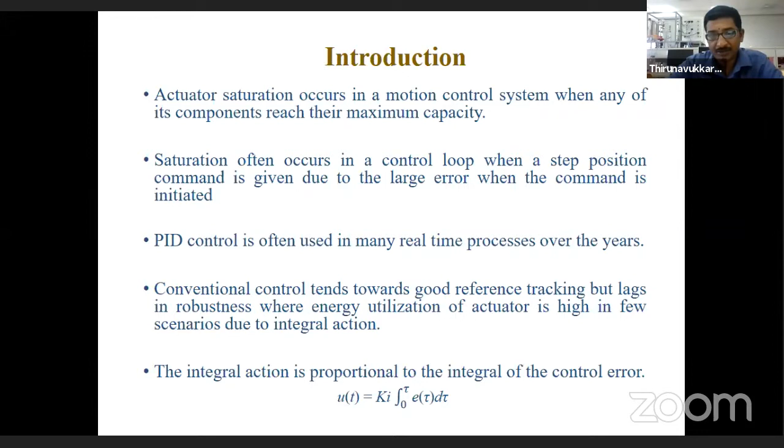I can recalibrate the maximum and the minimum speed of the pump, so based on the requirement it's like adjustable speed. I can fix the minimum and maximum RPM of the pump for the given 4 to 20 milliamps. It's like a peristaltic kind; the peristaltic pump is also operated with the same kind of feature.

But peristaltic pumps are meant for minimum flow. When you're going for direct pumping, I can operate from a few liters to 10 to 15 liters per minute. So that means I can go for a huge quantity. That is a huge version of the peristaltic pump.

So now, actuator saturation. What is called actuator saturation? Normally, when you're going with the simulation, we'll get a nice response with respect to the transfer function, the state space, or the differential or partial equation which you are modeling, either the linear way or the non-linear way. We get a very satisfactory response in simulation.

But once you go for real time, the simulation and real-time results will vary widely. Not only because of the non-linearity; there are certain issues with actuator saturation. Whenever you are simulating any algorithm in Simulink or in an M-file, we have to put a limitation on the manipulated variable. The manipulated variable is the controller signal.

Whenever the control signal is coming out, we should not consider it as 0 to infinity or a negative value to a positive value, because in reality any physical actuator will work minimum 0, maximum 100%. It cannot work below 0 and it cannot work beyond 100. So there is a limitation. That means this is a constrained problem.

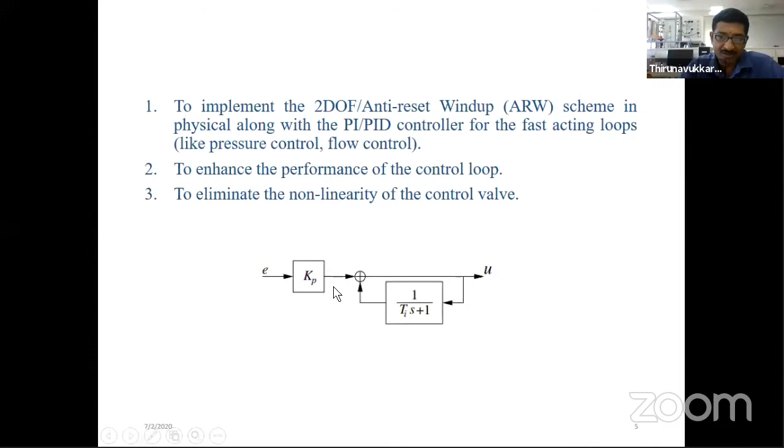Okay, one of the most commonly neglected undetected problem in the feedback control system. What wind up? That means I'm talking about the wind up issue now. Okay, so sorry. So wind up. One of the most commonly neglected undetected problem in the feedback control when you are going for the real-time implementation is, mostly we won't encounter it with the simulation.

Sometimes we design the controller, we accept the result as it comes, but we fail to analyze the system output is greater than 100, or sometimes the controller output will be beyond 100. Okay, it will be like 300, 350, even 700 it goes. You won't bother about that because in simulation, there is no wind up going to happen.

I won't bother about the actuating signal, but when you're going for the real time, none of the actuators will work beyond 100 and below 0. You have to put a saturation limit, else your results are going to be heterogeneous. Okay, that's what I said. The most commonly neglected and undetected problem in feedback control. The controller's command exceeds the physical saturation, non-linearity.

So in MCT, modern control theory, we study about the non-linearity. What we study, relay, saturation block. We go with the different non-linearities. Okay, so friction, viscosity, saturation, relay, hysteresis. So the different non-linearities are available, and using the describing function we can solve. The same way the control valve saturation is also one kind of non-linearity.

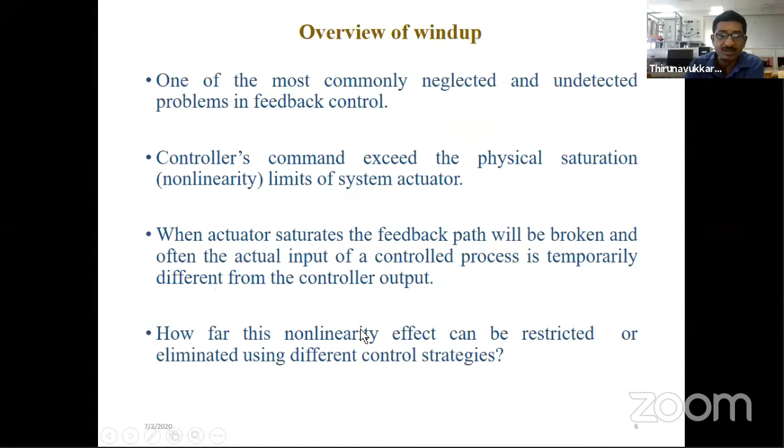So wherever you are using the control valve, do not use it without the valve positioner. If you use the valve positioner, yes, the last point in the last slide can be addressed. So how far can this nonlinearity effect be restricted or eliminated using different control strategies? The control strategy is going to be different. That means it is going to give the signal to the I to P converter. This is the I to P converter.

Because mostly we are going to use the electronic controller, it gives 4 to 20 milliamps. I cannot connect it directly to the valve. So give it to the I/P converter, which converts the current into pressure. The pressure is given as the actuating signal through the blue line, and this is the air regulator, which is used to restrict the amount of pressure coming from the compressor.

Almost 30 psi we will be giving, but maximum I'm going to use 3 to 15 psi here. The supply pressure to the control valve should always be double of its actuation. 3 to 15 is the actuating signal. My air regulator should be capable of providing at least 30 psi, double the 3 to 15. We keep it a little bit more because there will always be some pressure leakage.

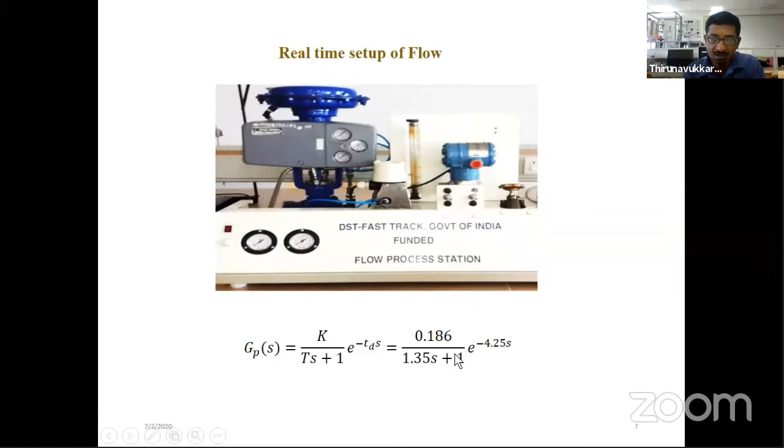The work was supported by the Government of India Fast Track grant. We have modeled the process, and we have got it as a locally linearized model. We got the model as a first order process with dead time.

I cannot explore all the control algorithms. I'll quickly tell about the problem which we stated. I think all are clear with the problems now. What are the problems? The actuator will go into saturation. So we should not go for the simple PID controller. We are going for the IMC based 2 degree of freedom PID. I'll explain what is 2 degree of freedom PID.

Normally, the PID controller will encounter overshoot. Always when we use a PID controller, I can go for proper tracking, but there will always be an overshoot. That is called the derivative kick. When you want to make the PID controller work like a first order system response, the response will start and directly go and settle. There will not be any overshoot or undershoot. It comes like an overdamped system and settles. It won't act like an underdamped system.

So the derivative kick problem can be addressed by using a 2 degree of freedom structure, which is an advanced control structure. People should know when we call it a simple control system and when we call it an advanced control system. Whenever you are breaking the concept of the single feedback loop and making some modification in it, it is called an advanced control algorithm.

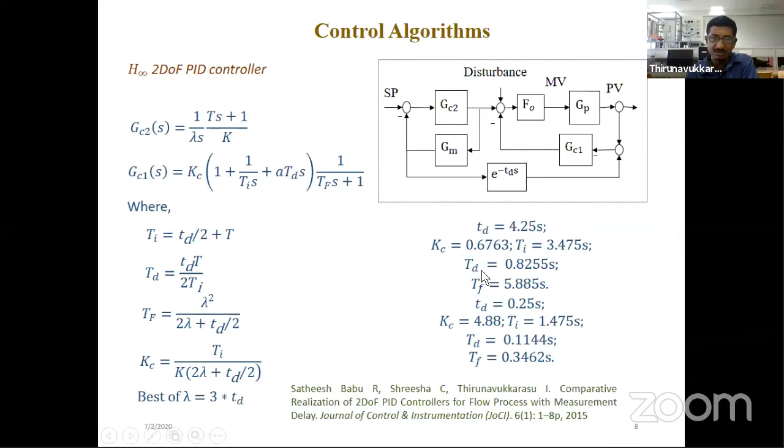The DAQ we used was the constraint, but presently we have a DAQ card where I can define my own sampling time, like a DAQ card or dSPACE. Yokogawa has released one DAQ card. There are many DAQs available, advanced control equipment.

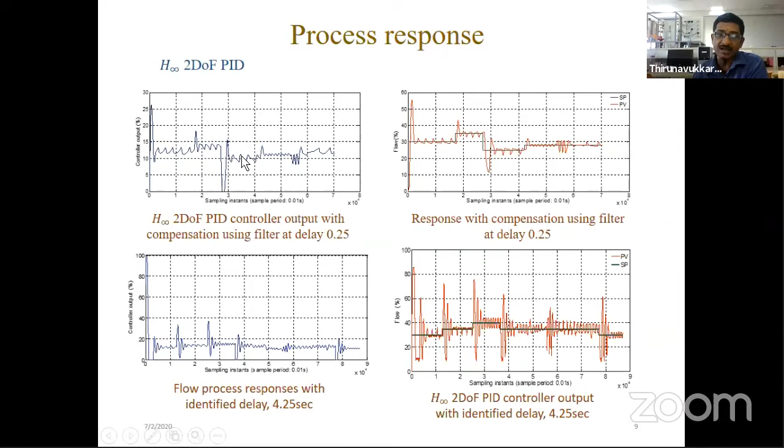Even if it is a pneumatic actuator, the rough movement of the valve will lead to wear and tear, cavitation, flashing, etc. Many things will happen because of the flow process. Cavitation and flashing are other problems. Once the actuator keeps on oscillating, it leads to several other problems. So here we are getting a smooth controller action compared to this. And once I make the MV constant, I can get a better PV also.

This is the 2 degree of freedom PID. This is what he has done here: one is 2 degree of freedom PID, one is H-infinity based 2 degree of freedom PID. When you come to the 2 degree of freedom PID, concentrate here. I mentioned EI, the integral error. I'm not talking about the overall error, I'm talking about the integral error. Integral error is KC by TI times E. This is the integration plus this is the saturation limit.

If I give a control signal U which is higher than 100, U saturation is always 100. I don't have the diagram. If you have a control signal followed by a saturation block, and the input to the saturation is 120, the output of the saturation block is 100. The input to the saturation block is U, the output is US. So 100 minus 120 gives a negative value.

TT is the tracking time constant. TT is equal to TI by 2 is considered here. There are several formulas for the tracking time constant. TT equal to TI I can use when I'm using a PI controller. TT equal to square root of TI TD when I'm using a PID controller. You can refer to the book of Antonio Visioli, Practical PID Control, to understand that. I've told it orally in brief. These are the structures of TT we considered.

So what happens if I consider this? I can go and reset the value. Whenever you are using a PID controller, remember your KI or integral action should not always be present, which creates the problem of saturation. So what should I do? We should limit the integral action. Once the controller goes to saturation, my integral action should be cut temporarily.

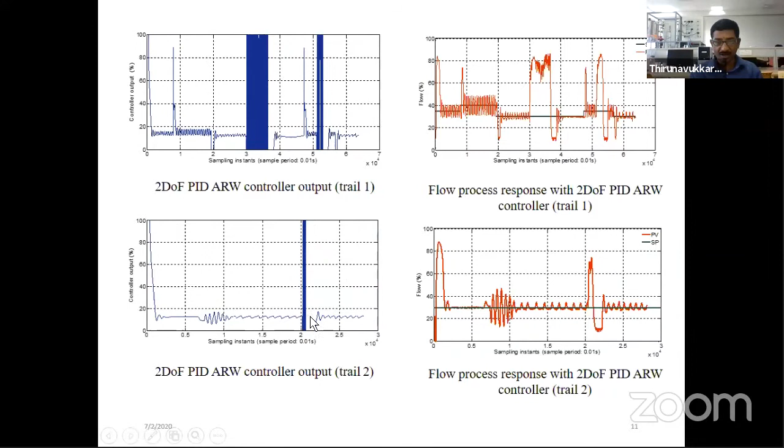You can see exactly between 2.1 and 2.3 the system output went out of control. That means the actuator signal goes below 0 and beyond 100. This is the problem. This should not happen in the process industries. And we have proposed some solutions with the PID controller. See here, the wind-up is happening, but still my process variable can track the set point irrespective of the wind-up issues. So the process response is tracking the given set point change.

See here, why this happened: at 2.8 something, I gave a set point change. This is what I said. Once a large error happens, the wind-up issue will happen. I think I addressed it in the first slide, third point. So you can see here I gave a set point change. Can you see the time? Almost 2.8. You can see the wind-up happen. That means once the system error changes drastically in a real-time application, the wind-up happens.

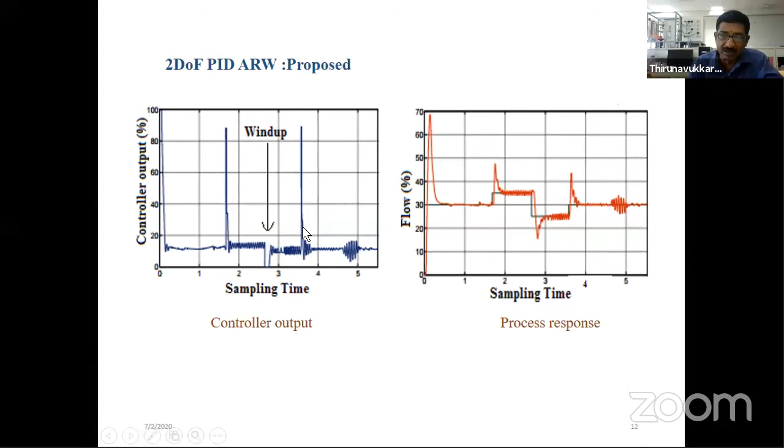But here we made the solution for the 2 degree of freedom anti-reset wind-up. Hence, the system output is not going out of control. It can still track once the wind-up issue is happening. So here we made a different plot. Here we plotted the error as well as the controller output, because these are the concept of anti-reset wind-up. So we plotted error and the controller output together in a plot.

Blue is the controller output, the overall PID controller output, because the controller action is based on the error signal. So this is the error and this is the controller action. You can see here there is a change in the error. Obviously, my controller output goes to 0 to 100, and then it is tracking back here. This is the wind-up region.

It can be observed that the final control element was released from its saturation as quickly as possible to minimize the IAE for a large reference set point change. That means we have implemented the solution for the wind-up issue. So even though the blue line, which is the controller output, goes to saturation, immediately it will be kicked back from the saturation stage. That is with the help of the anti-reset algorithm which we selected.

So you can see immediately after reaching the minimum value, it goes to 0, and then it has been pushed back to the nominal above 0. Look at the y-axis scale, 60 to 0, and below 0 is where the controller action shows saturation happened, but it has been quickly sent back.

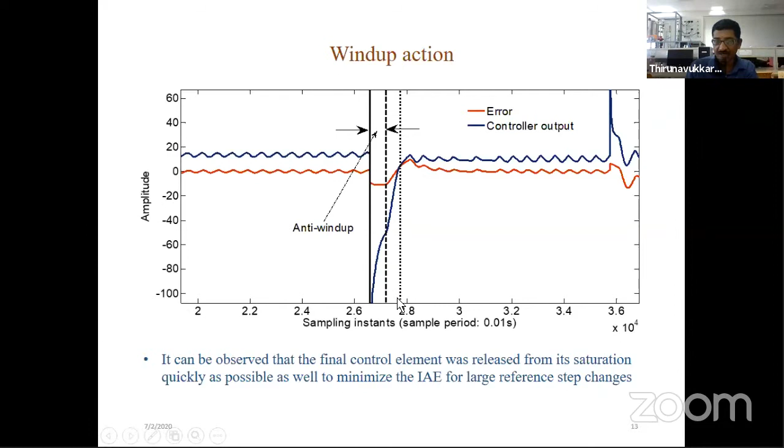Within 2.6 seconds is a real-time result, 2.67 within 2.78. Quick action has been taken by the proposed anti-reset windup, and these are the time domain as well as performance results.

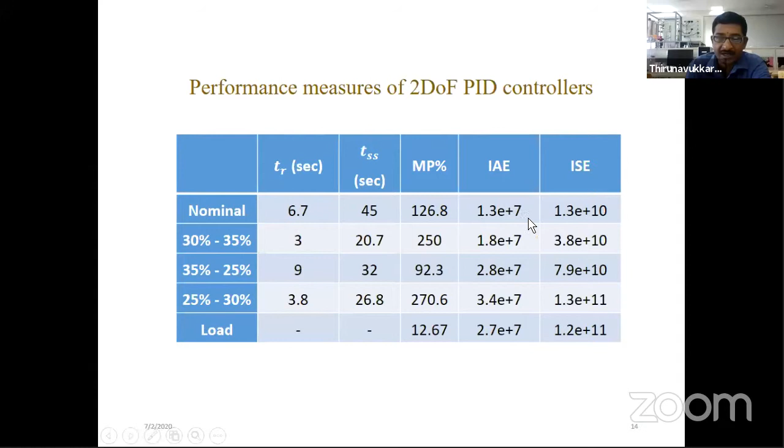It's a heat exchanger. So once the system model is locally linearized in terms of a first order system, once the hot water flow rate varies, the system will move from one operating point to the second operating region. You can see four rotameters, one is for the input cold water to the process tank, and this is the hot water inlet to the heat exchanger. So what is the heat exchanger?

It's majorly used in all process industries - dairy industries, chemical industries, all process industries have a heat exchanger. Even in simple dairy industry, there is a process called pasteurization. What they do is the dairy product will be boiled to a higher temperature, and suddenly the temperature needs to be lowered. So pasteurization happens in all dairy industries. They use the heat exchanger because the difference in temperature they bring is very high, almost 10 degrees and above.

So in a short span of time, because huge quantities of dairy products are involved, they cannot cool down that quickly, so they use the heat exchanger process. Or in distillation also heat exchanger needs to be used, to convert the vapor into the top product. Anyhow, this is the process description, so I'll skip it for the time being.

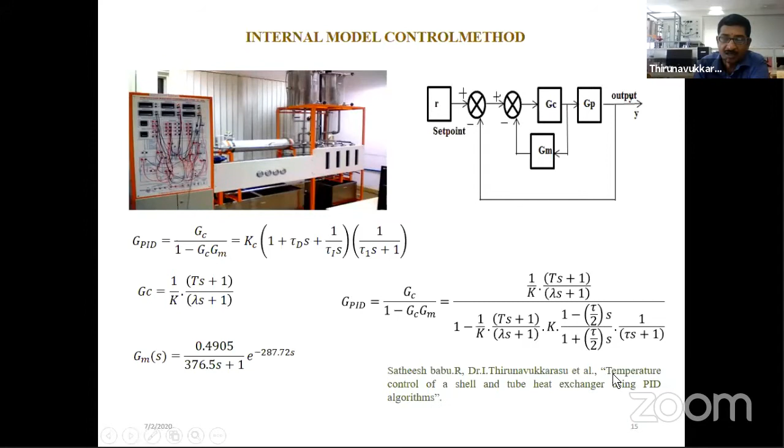This time the time scale is given in seconds, you can convert it into minutes or hours if you want. This is the PID control structure, simple IMC PID we have used. This paper is there with the title 'Temperature control of a shell and tube heat exchanger using PID algorithm.' I think in 2013 we presented this paper at a London conference.

Can you see, because in temperature process we cannot give set point changes like 10, 15, 20, etc. It will take time. Maximum if you're working with a real-time temperature process, maximum 3 to 5 degrees Celsius we can give, because it's a slow acting process, else your actuator will go to saturation. For 2 or 3 degrees only it is going.

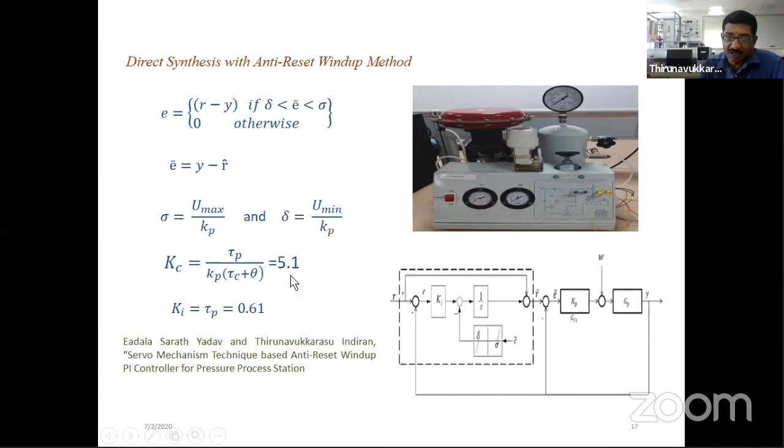So we implemented this KPKI structure, using a saturation block, etc. Here is the result of anti-reset windup with and without anti-reset windup for the process - a very fast acting process, which is a pressure process.

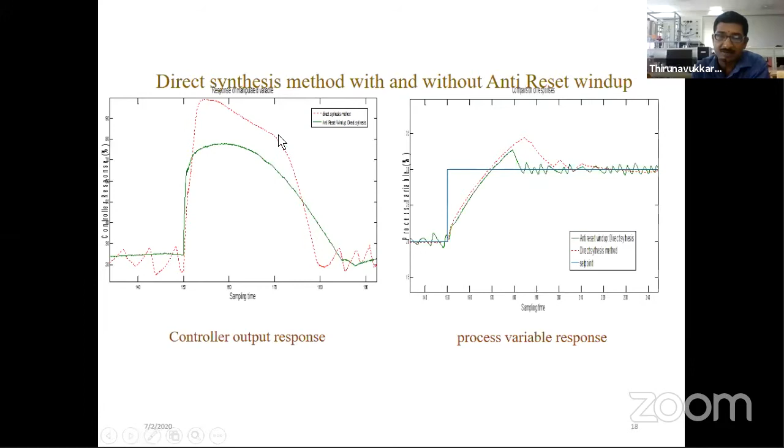You can see the anti-reset windup is giving a better response. Not only the process variable, but even the manipulated variable of the direct synthesis acts very violently compared to the manipulated variable with anti-reset windup. The PID controller is the same - we either added the anti-reset windup scheme to it, or we didn't add it to the other scheme. You can see these are all real-time responses, not simulation responses.

And then you can go for the modified Smith predictor. This is published in Springer proceedings, I think in 2016. It's available online, you can refer to it - the modified Smith predictor algorithm.

Whenever dead time is present in the system, we cannot go for normal controller design with PID. There is a technique called the Smith predictor, proposed in 1957, almost more than 60 years ago. Several research studies have been carried out on the proposed structure - this is not a 1957 structure. The first initial concept of the Smith predictor was proposed in 1957 by the scientist Smith, and henceforth it is called the Smith predictor.

There have been several modifications made to the Smith predictor structure by Normey-Rico, Watanabe, Ito. There is a certain group of people who worked intensively on the dead time saturation problem. Whenever dead time is present, they go for the modified Smith predictor concept, which we call a dead time compensator, DTC. Several modifications are still happening in that area, and we have used the back calculation method proposed by Antonio Visioli.

Okay, there are several structures given in this textbook, you can go through it. C1, C2, which is controller 1, controller 2. This is the diagram I'm talking about, this is the proper diagram of the anti-reset windup. Everyone can look, this is the controller. Whatever it may be, C1, C2, you block together as a single controller.

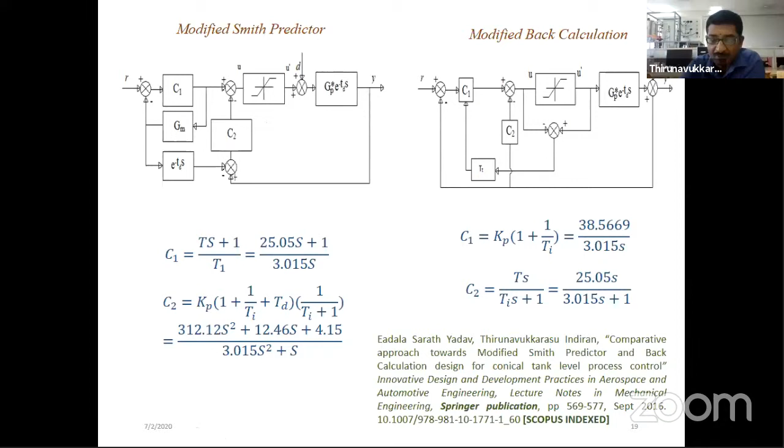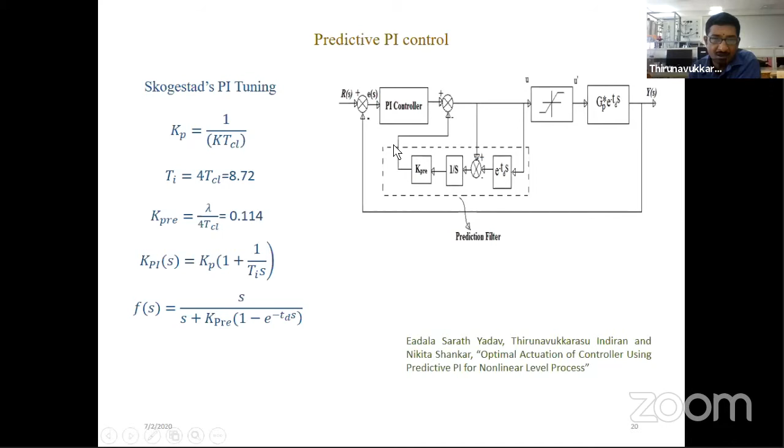And this is one predictive PI control structure, it was published under this title. So this is the control structure which we have made, and we can get a better response with this structure.

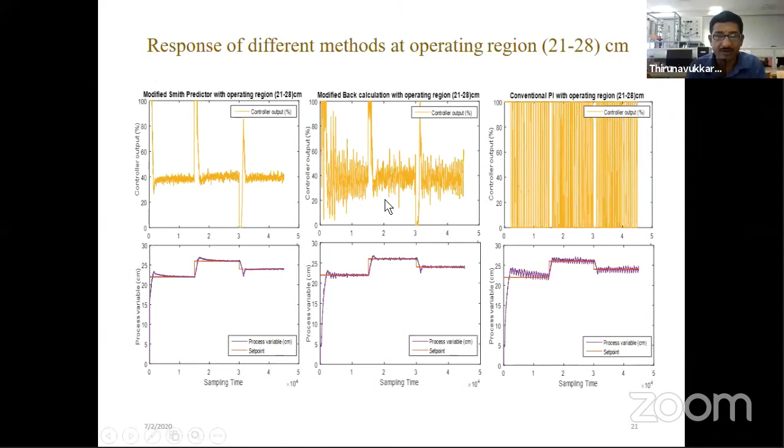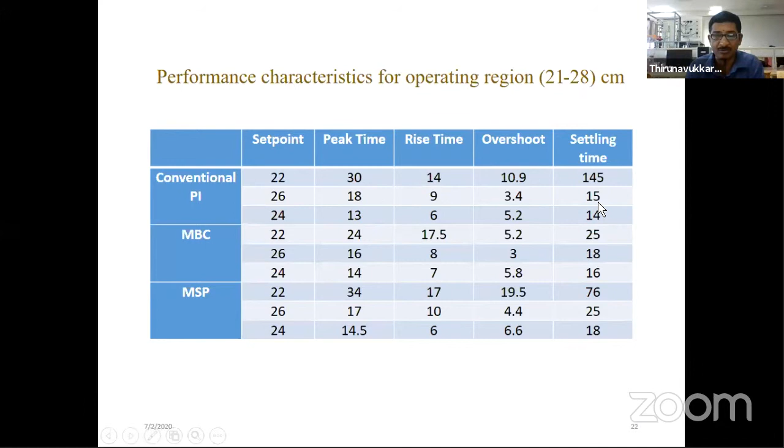Look at the controller action. There is no oscillation; the manipulated variable comes like a simulation. Look at the process variable. With damping, it follows the quarter decay ratio. When you're going for a PID controller, you should know what quarter decay ratio is. The first peak should be at one particular value, the second peak should be 1/4 of the first peak, and it should decay in that way. It's a well-established tuning rule. Your controller is good means it should follow the quarter decay ratio.

We operated it for different operating regions, and everywhere we are getting a very smooth operation. This is the physical setup which I have in the laboratory, which I showed initially.

Can anyone put a message? Are you able to track properly, listen properly? Organizer, moderator, any update? How is it going? Sir, it is fine, sir.

Okay, good. You can see here this is the control valve actuation, and this is the conical tank. What we did initially, why we made this setup cascaded: initially we had the pump here; this conical tank was given with the pump. Now I'm going into the nonlinear. First I showed the single flow process station result.

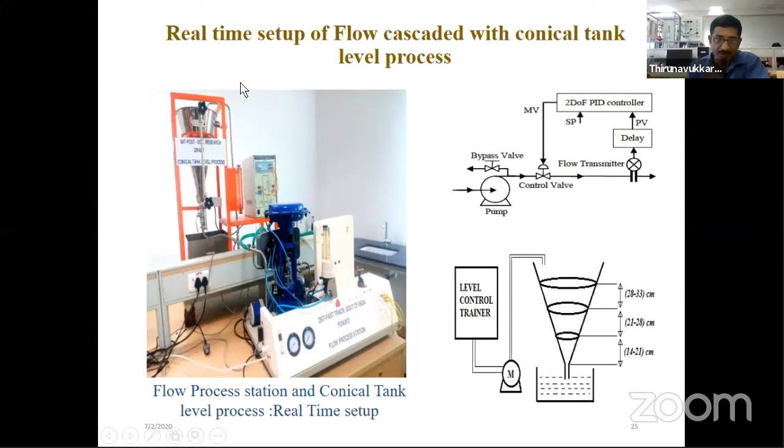So we cascaded the flow process station output with the conical tank input signal. We cascaded these two processes. And see here, this is the conical tank. You can see the non-linearity. I will explain how the non-linearity comes here. There are different regions: second region, third region, fourth region. We identified different models. In the second or third region, it works properly without much oscillation.

But once you come to the lower region, you can see the oscillation starts, because the model identified and controller designed is for the region 28 to 33. I think I showed it in the previous slide. In that region it works properly, but below that it is oscillating. You should understand this very clearly. We cannot model a system as a single transfer function or a single state space, because a nonlinear process has multiple operating points. It has multiple models, a multi-model.

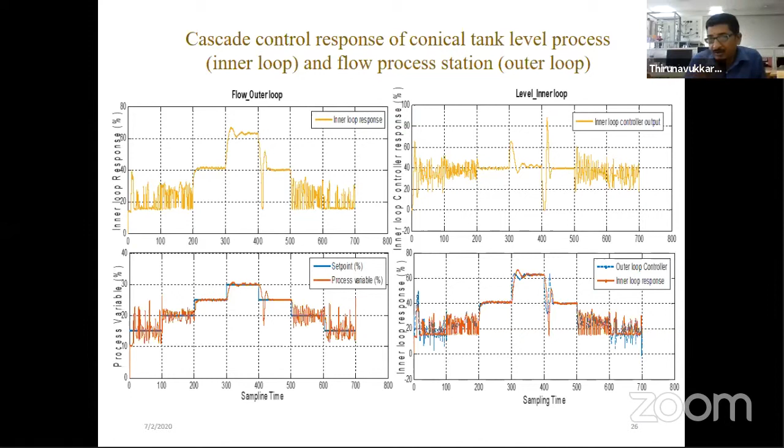That's the reason we should go for nonlinear controllers. We tried that too. For different operating regions or modes, you identify the model in a nonlinear way. This is the work done for the conical tank system with relay-based model identification. Relay is a non-linear term: relay, saturation, hysteresis, viscosity, friction, a class of nonlinearities. So here we modeled the system using a relay-based operation and identified this model. You can see here we got a perfect result.

We should not compromise once we get a good result with one particular method. We should try to get a better response with the simple PID. There is a group of professors working on the PI controller in India, like Professor Dr. M. Chidambaram from IIT Madras. If one group gets a result with an advanced control algorithm, he will try with a simple PI to get a similar response. There are certain PID groups all around the world who work only with the PI control structure and get results equivalent to advanced control algorithms with simple PID.

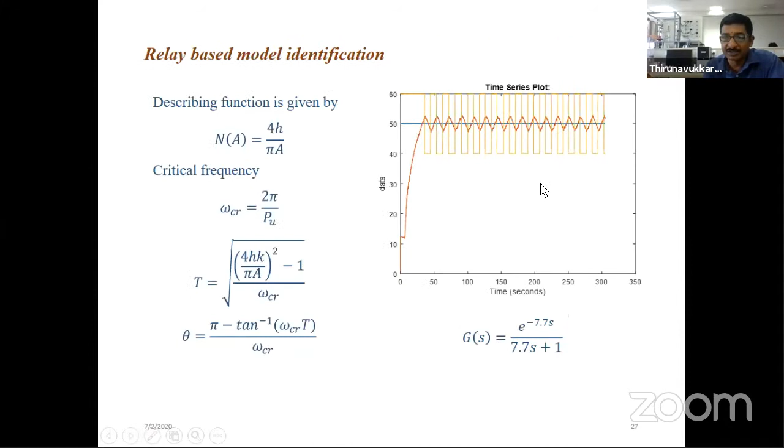Means we have identified the exact model using different techniques. Okay, do not go for a two-point method, that is the process reaction curve. Maybe for initial understanding, okay, but when you're coming for real-time process model identification and implementation of a control algorithm, go for a standard identification method. There are several in literature.

We got a better response. See here, we gave a set point change and there is no overshoot or undershoot. There is one overshoot, it got settled. I applied a load again, one overshoot, got settled. Look at the manipulated variable, it reaches steady state. That is very, very important.

What is the title I gave? Actuator energy minimization and optimal use of actuator. See, I'm using my actuator optimally. It oscillates and the actuator output comes around 45 or 46 and settles. When I give a set point change, it rises again to bring the level. Once the level is brought here, again it becomes constant.

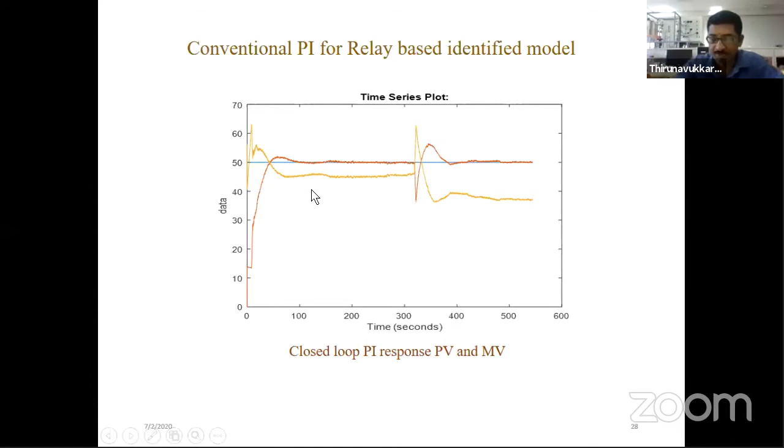Temperature, pressure, flow, level, anything you work on, our actuating signal should be at steady state. Until then, you have to rework. There is no other option. Or tune it. Identify where you made a mistake, and minimize it. A good control engineer will not leave the manipulated variable oscillating for long. Okay, fine. So end of first presentation, I'll go to the second presentation.

We deeply acknowledge the financial support which we received from the DST, Government of India. We completed this project in 2017. This is the book which I said. Antonio Visioli, Modified anti-windup scheme, sorry, it's a paper. He has written a textbook also. These are the major papers of Antonio Visioli which we followed for the anti-reset windup. As I said, Weidong Zhang from China worked on this paper.

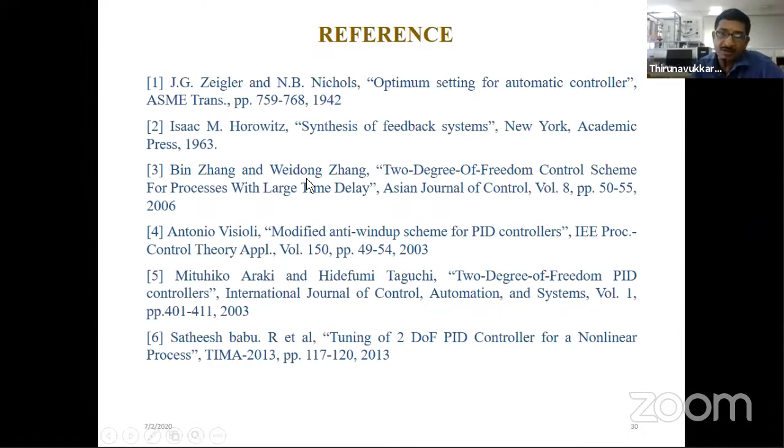I think this group is from Italy. Matausek, this is also very good. M. R. Matausek's group worked extensively on the modified Smith predictor. Watanabe and Ito, long back in '81, and still people are working on that. The same group is also working; the last Watanabe Ito paper I have seen is from 2007 or so. O. J. M. Smith.

The predictive PI is the Pasi Airikka paper. That group worked with predictive-based PID, not the MPC-based control structure. It's a different concept of predictive. As I said, Professor M. Chidambaram's paper, you can see here: relay auto-tuning identification. His latest work is also on relay auto-tuning identification, and he has recently written a textbook on relay-based identification with Cambridge University Press.

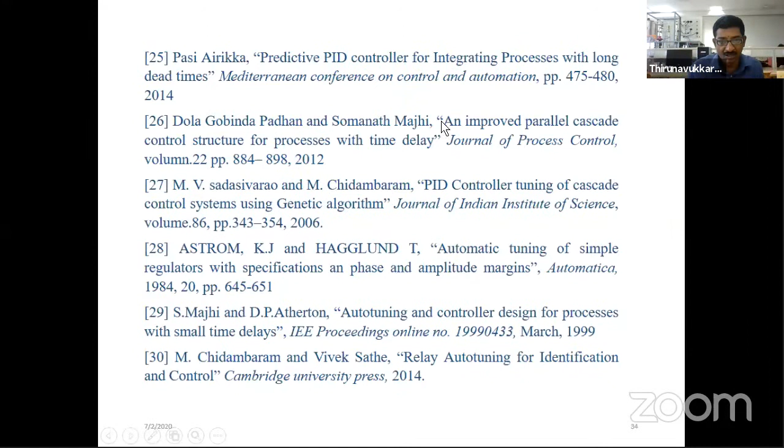PID control for cascade. Whatever result people get with advanced control algorithms, the professor will get the same result with a simple PID controller. And Somanath Majhi is with IIT Guwahati, EC department. He extensively worked with dead-time processes and integrating processes.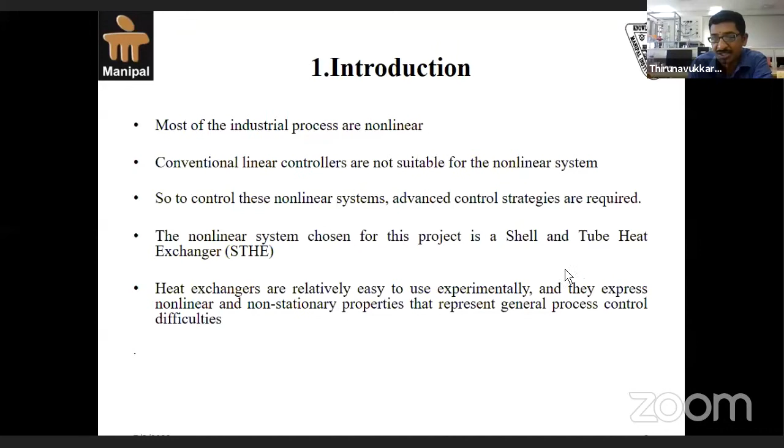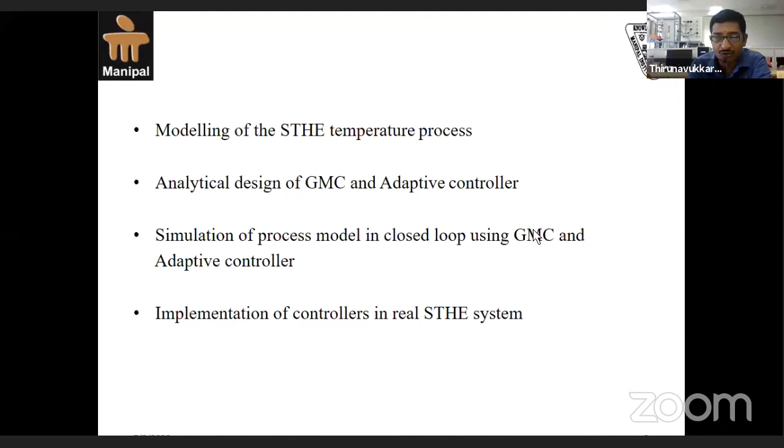The modeling of the shell and tube heat exchanger can be done in a linear or non-linear way. Analysis of the GMC and adaptive controller, simulation of the process model in closed loop with the GMC and adaptive controller, and then we implemented it on the physical system. This is the kind of work we started in 2013 for the shell and tube heat exchanger.

See the paper comparing model-based and conventional controllers on a pilot plant heat exchanger by Russell Rhinehart, Oklahoma State University, US. PMBC, process model-based controller; they started with that, then we started communicating with them. And you can see self-tuning controllers by Bobal, and Dostal and Bobal. These two authors worked extensively on self-tuning controllers for non-linear processes from about a decade back.

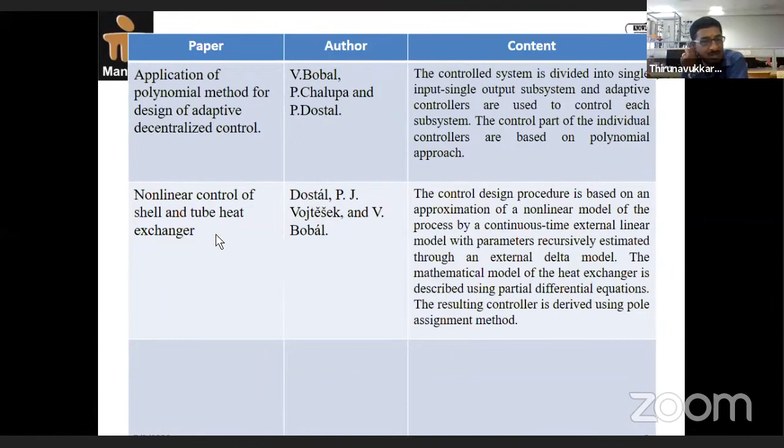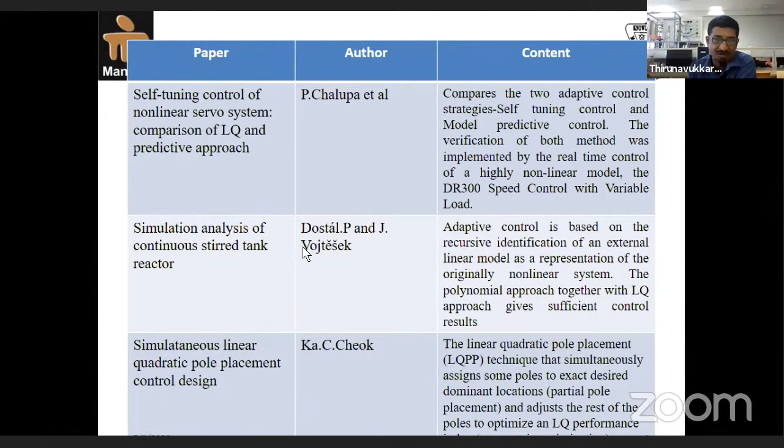There are some contents we have noticed. Just start counting: Bobal, and Dostal and Bobal, are almost the same group. One paper of Bobal, a second paper of Dostal and Bobal, a third paper, fourth, fifth. You can go through the titles also. They applied polynomial adaptive control for the shell and tube heat exchanger. You can see some comments given by Bobal and Dostal for the respective papers. Again Dostal, Bobal, simulation, and they worked on a CSTR process. Again Vladimir Bobal.

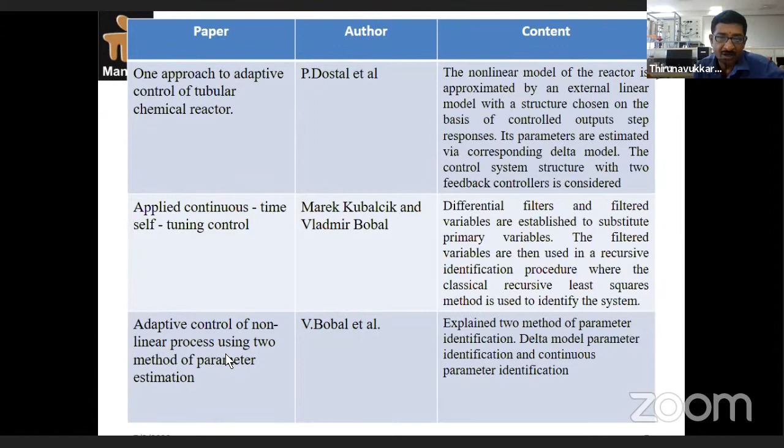Continuous-time self-tuning controller, again Bobal et al., for a non-linear process using two methods of parameter estimation. Again Dostal, again Bobal. What I want to convey is not the author names, just that one particular group has worked extensively on self-tuning controllers.

Okay, and the inference is what they said from all the literature survey, whatever I showed. When you are going for the industrial grade shell and tube heat exchanger control problem, you should not work with a static controller. Remember, when the process is dynamic, your controller should be dynamic. I should not put a static controller for a dynamic process. That is the case with the conical tank also. Area of the tank varies continuously. System is dynamic. I cannot put a static controller and blame the controller for not working. That's what I said, the problem selection, model identification selection is very, very important. We cannot simply put the blame on the controller, which is wrong from the author side or the people who are working on it.

So remember here the process is going to be dynamic, hence I need the dynamic controller. You can see here I'll explain the process. First understand the process, then we go for the control of it.

So heat exchanger, I'm giving the hot water inlet and it passes through the copper tubes and it is coming out. Remember, in the heat exchanger, there will be separate copper tubes and separate flow for the hot water and separate flow for the cold water. Both will not get mixed, but one goes surrounding the copper tubes.

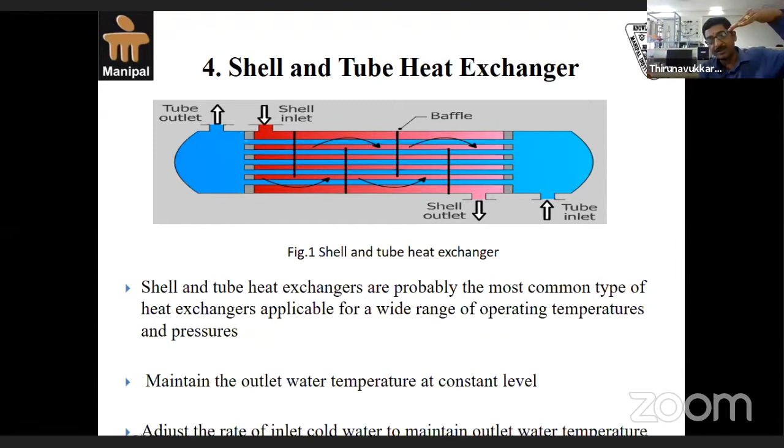Okay, my set point is 45 degrees Celsius. My process variable is at 40. Whether I should permit the cold water or not - set point is 45, process variable is at 40 - obviously no water should flow, because if the water goes, it carries away the heat further. Stop the cold water, then the temperature will slowly rise. Once it crosses 45 and keeps going above - 46, 47, 48 - then the valve should open and permit the cold water slowly. The heat transfer will happen. Once the heat transfer happens and it comes back down, goes below 45, then the valve should get closed. Got the point? This is the concept.

See here, for the generic model controller we have not identified the mathematical model using a transfer function approach or a state space approach. We build a first principle based model. First principle based model means using laws like the second law of thermodynamics, third law of Newton.

So M rho Cp is equal to UA delta T. If it is a constant mass, they call it a CSTR, meaning M rho Cp is equal to UA delta T. Here F means the flow rate, because the cold water flow is flowing in, so I replace M with F. M rho Cp delta T is equal to UA delta T. U is the overall heat transfer rate, and capital A is the overall heat transfer area.

See here, there are 4 temperatures, no? Inlet hot water, outlet hot water, inlet cold water, outlet cold water - 4 temperatures, and I used all 4. H means hot water, C means cold water. Hot water outlet temperature plus hot water inlet temperature, divided by 2, minus outlet cold water plus inlet cold water divided by 2, multiplied by UA, is equal to F rho Cp times the cold water inlet and outlet temperature difference. Now all these 4 temperatures are readily available in my hand.

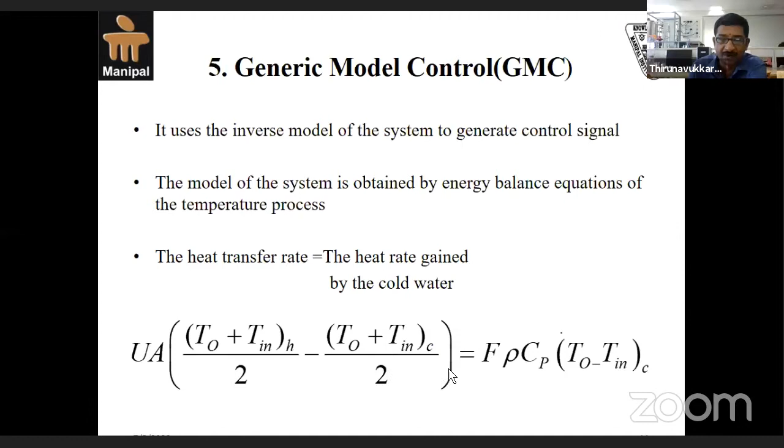I'm rewriting F is equal to UA... where is the F? Here. Okay, if I bring F out, UA divided by rho Cp will come. Correct? UA divided by rho Cp. The 2 in the denominator, both are common, so I take it as a common factor. So what happens here - I've rewritten F in terms of this. Then how to identify the F value?

How to identify the F value? Because I'm using a control valve. If the percentage of valve opening changes, the flow rate of the valve will vary. We have to relate that and use this formula.

See, the cold water valve inlet has equal percentage characteristics. The control valve I have in my laboratory is an equal percentage valve. Therefore the flow rate and control signal can be related, and the control valve can be identified. The relation is F equals M naught, e power mu into U. See what I'm going to do - we have experimentally identified this.

I'll take this value for now, you get this relation. Replace the F value, substitute it in this place. So what happens: M naught e power mu U is equal to UA divided by 2 rho delta Cp. This is the formula, and I want to get this U and the control signal U. This is the overall heat transfer rate, capital U; the control signal is small u.

Okay, I want to get this. What about the exponential term? Take ln, natural logarithmic. U is equal to - rewrite the equation. M naught also goes to this side, so ln of 1 by beta - this is the control signal. Using the first principle method, we got the control signal. How to identify the constraint? We should know this parameter and this thing. Now there is no transfer function shown.

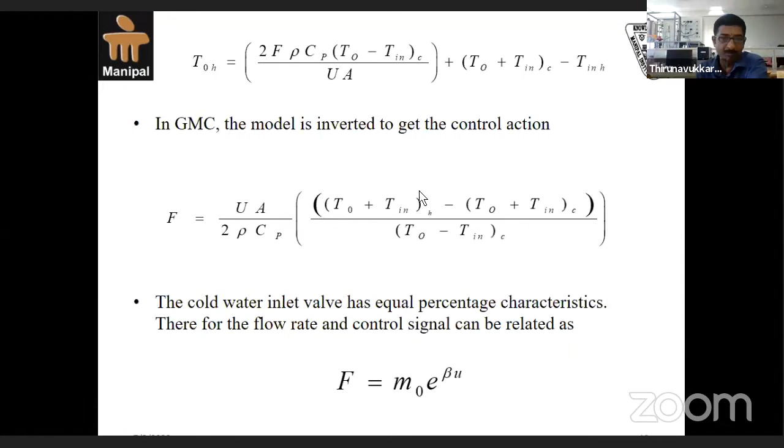The model is not exactly true to the process, which is the case in all real-time processes. All the pilot plants will have the same issue.

See here what we did. We used model identification of the actual control valve in the laboratory. I'm fitting it to the nonlinear function. These are the percentage of control valve opening, and these are the outputs, the liters of flow which you measured. The blue is the actual data obtained from the control valve, and the red line is the fitting which you have done.

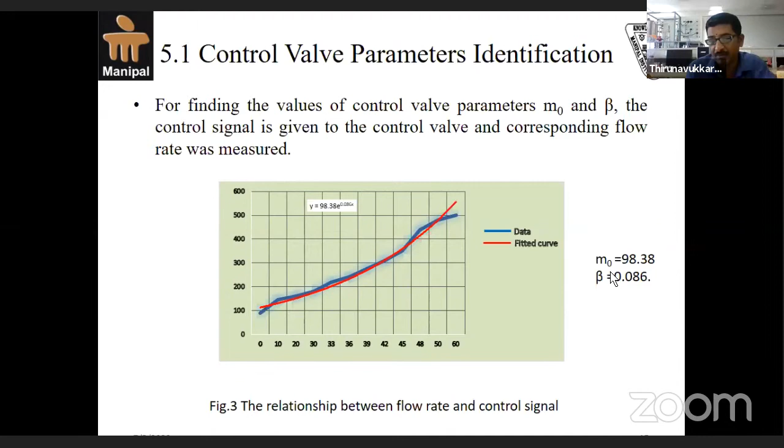So I got my m naught and beta value. Substitute here. Look at this, what I said, m naught and beta. Now I got this value: m naught is there, beta is here. I can substitute those two values.

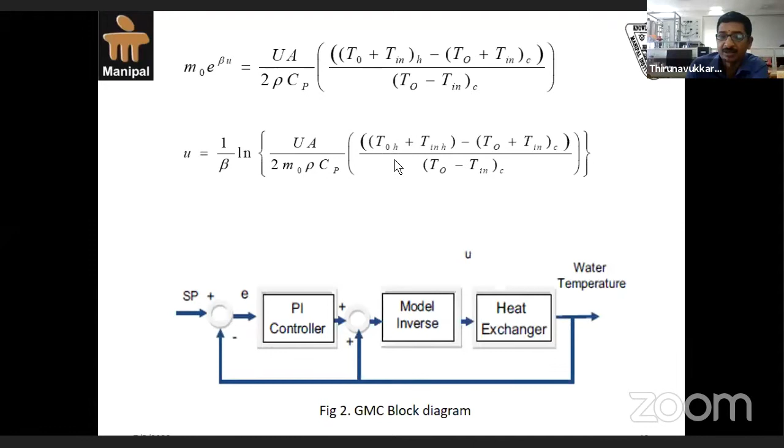If all other parameters are known, U is known, A is known, rho is known, Cp is known, and all four temperatures are measurable, then if you know m naught and beta, my control signal is ready. Then what's going to vary further? All these four temperatures are going to vary, so my control signal is going to keep getting updated. This is the control signal which we have generated.

All these values are substituted with respect to the physical system. See here, all we calculated: four unknowns are the temperatures. If the temperatures keep varying, I'll get my U. So I came to the multi-rate model, meaning whatever flow rate I give, wherever the temperature goes, I can get the control signal. The control signal is going to vary in line with the model changes.

These are the adaptive control concepts, and we use linear regression. We use linear least square regression, recursive least square algorithm, ARX model to obtain this. This is the project which we did in 2013.

We keep improving it. That is a different case: ARX, NARX, ARMAX, etc., we are doing. Nothing more to explain there.

Based on the past input output, I can get the phi, the coefficients which you get with respect to the past input and output data: A1, A2, B1, B2, etc. are the coefficients. The objective function is to minimize the error, the square error. That means I have to keep updating these values and substitute them, putting the Y value as minimum as possible with respect to the original system. Then only can I get my error equal to minimum.

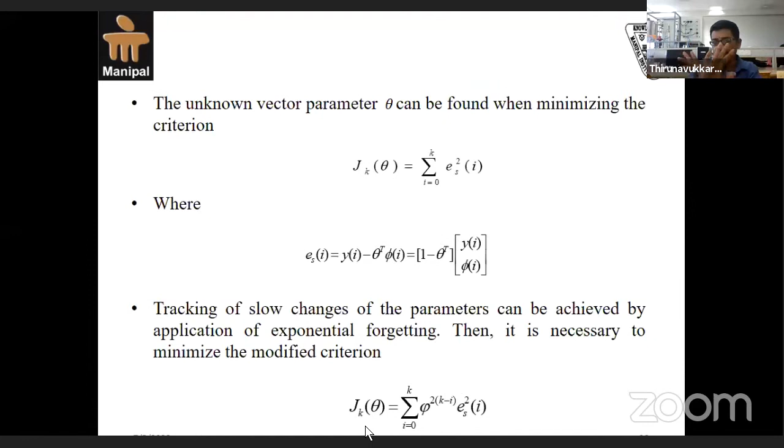Once your actual identified model of the process is equal to the true model, your error will be very less. Least square regression, then my model, meaning I'm not going for transfer function, I'm not going for state space. Online I'm calculating, minimizing the error as it is, then going for the controller action.

So this is the parameter estimation. What is parameter estimation? In the previous case, I said A0, A1, B0, or I fix the structure, the plant should be in this form. Then the plant, meaning I am assuming the plant is a second order process.

Then I should do parameter estimation. Because all the four temperatures are measurable, I don't want state estimation. I want only parameter estimation: A0, A1, B0. I should keep on measuring it. So these are the arithmetic calculations which you calculated. These are all standard methods for the least square estimation.

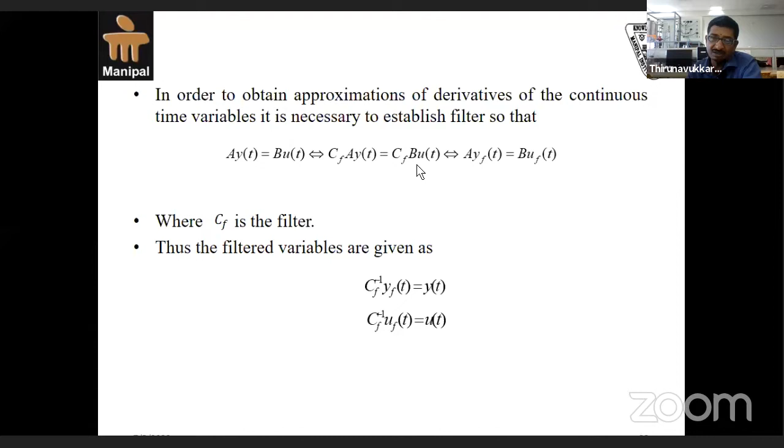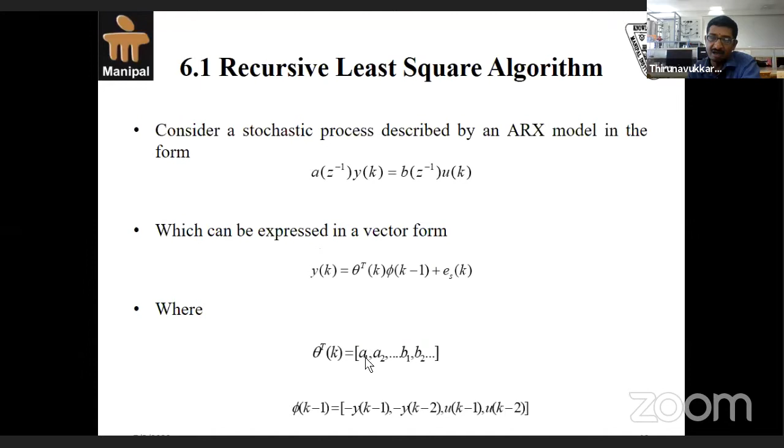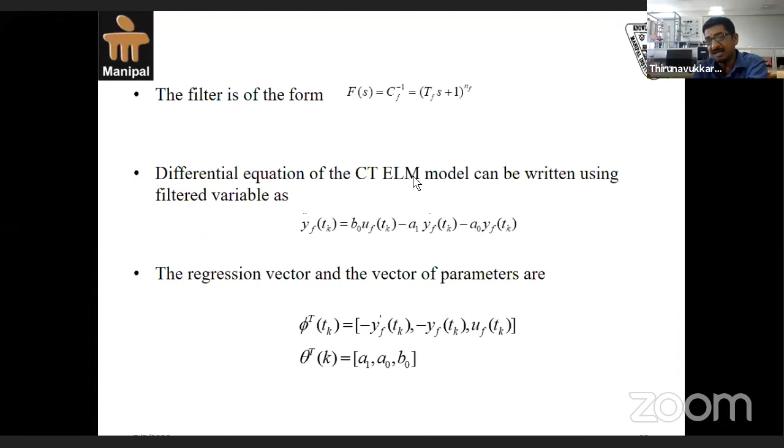So how to calculate the filter form? Initially, when I said it here, I represented it in a generic way: A1, A2, B1, B2. But I restricted it here. When I fix the structure, I have only three parameters. So I should do the ARX model only for the three parameters. Extended linear model. ELM means extended linear model.

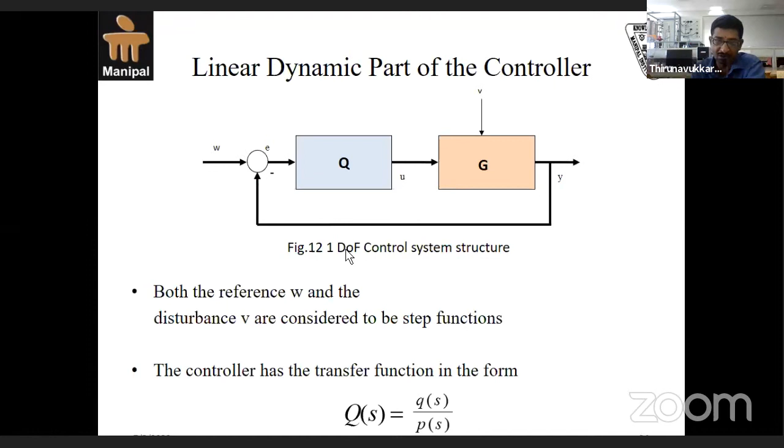So you see here, we operated it as a 1 degree of freedom. I'll show the 2 degree of freedom very soon. Q by P. Once you are calculating these ARX models, I assume you are aware of the ARX model. We cannot explain the ARX model here. It's a standard procedure; you can go through any reference material. Always the denominator should be higher order than the numerator, for realizing the system. That's what we are doing here.

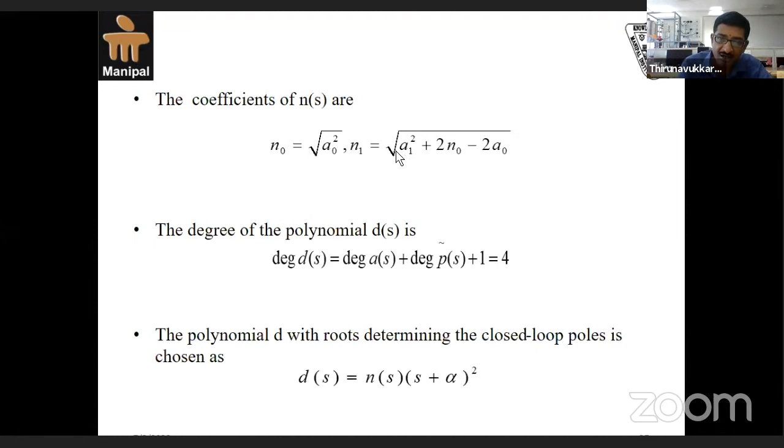Yes sir, because the numerator is second order and the denominator is coming as first order, we are approximating it with one more. Yes, the numerator and denominator become equal, and the polynomial has the form. Proceeding further, I can get my N of s, where N1 and N0 are the two unknown parameters. How to calculate N0? A0 is known from the previous parameter estimation. The square root of A0 squared is N0. What is N1? It involves A0, N0, and A1. Substitute here and I'll get N1.

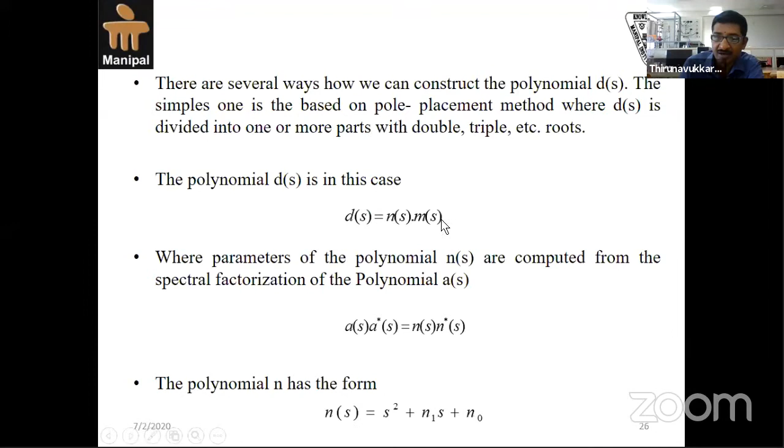We discussed P(s) on the previous slide. What is D(s)? N into M. Numerator is called N, denominator is called M. Complete this and get the S polynomial. Rewrite this in terms of parameters computed from the spectral polynomial A of s, in the form of A star, N star. Here I'm getting N of s, which involves N1 and N0. Substitute over here and get the form of D(s) finally.

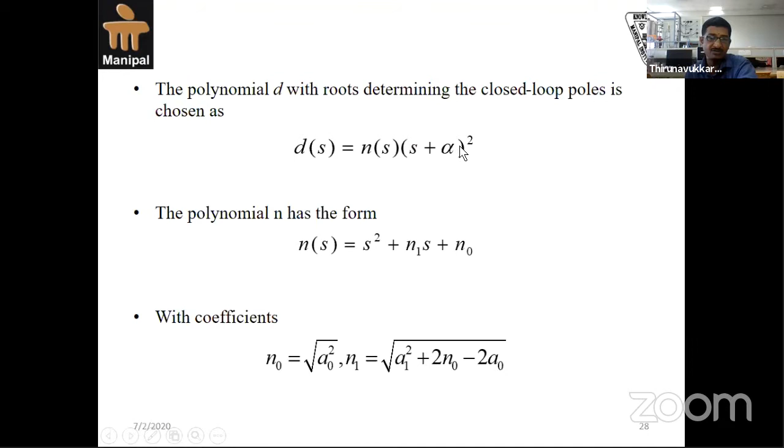Once you get D(s) and N(s), substitute over here and get the D(s) polynomial the similar way. Lambda, alpha, is going to be the tuning parameter, and then I'm going to put all the ARX model in matrix form. Look, these are all plant parameters, these are all control parameters. I'll show it in the next slide.

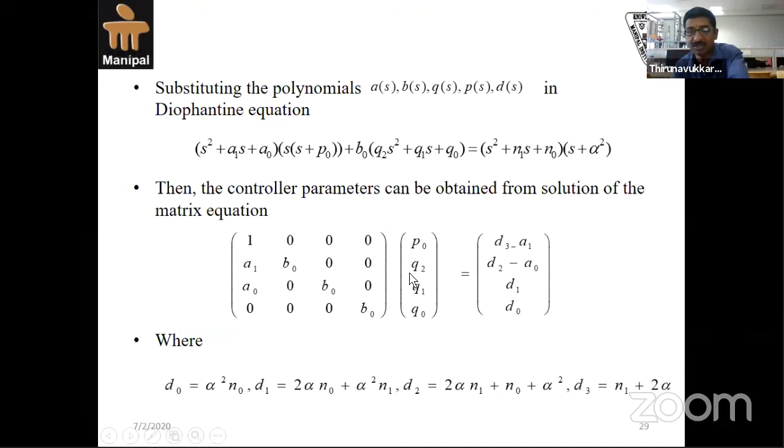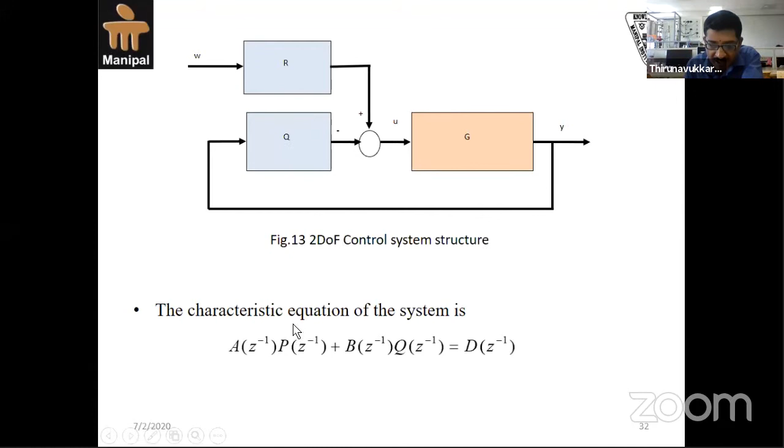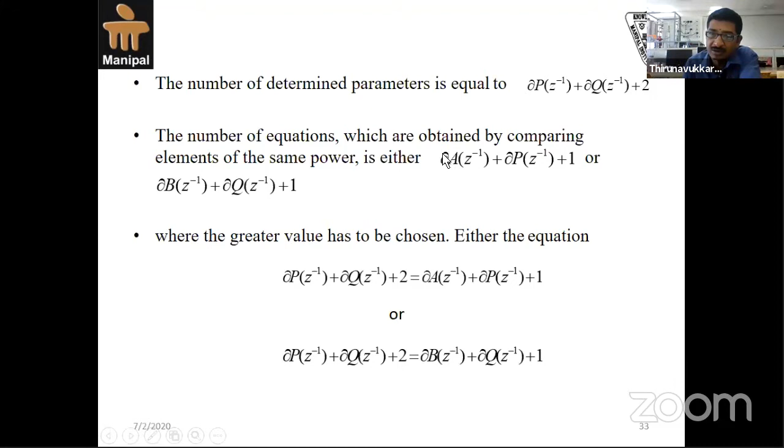So G is the system dynamics. Here we convert it into 2 degree of freedom, Q and R. We have to write the characteristic equation for the block diagram. Simplify it as the previous equation, and apply the partial fraction to linearize it around an operating point. You can refer to the paper we published or the standard procedure to get the linear form. What are Q and R? Q and R involve all the controller parameters. G is the plant, which involves A and B parameters, and Q and R are the 2 degree of freedom controller which forms your controller structure.

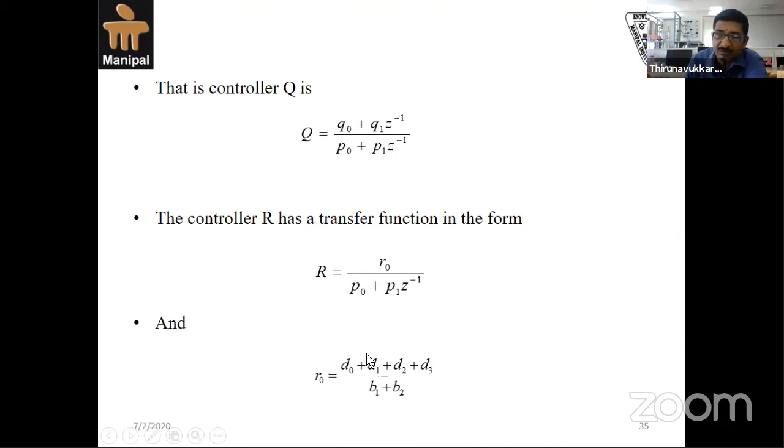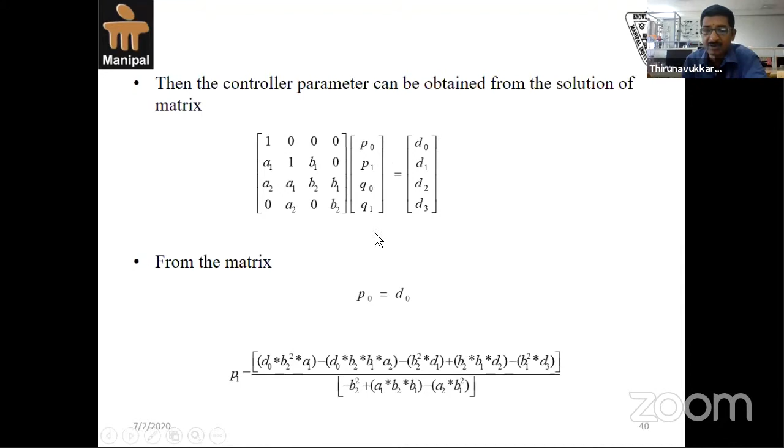These are highly mathematical, so I'll skip to the result. These are all plant dynamics, these are all controller dynamics. To get the controller parameters with respect to the right-hand side equation, d0, d1, d2, d3, which also involve the known plant parameters a1, a2. p0 is calculated from d0: if you multiply, all other elements become 0, so p0 equals d0. The same way, you can write the expressions for p0, p1, q0, q1.

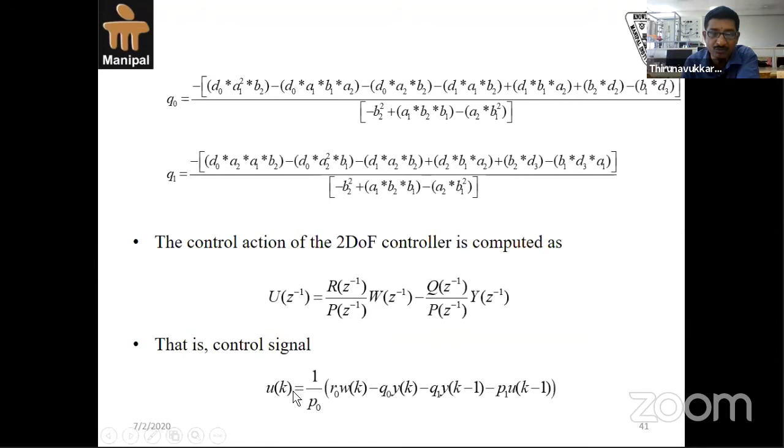That's what we did here. Simple arithmetic manipulation, substitute one over another, we are able to get it. And this is the controller action. As I said, P1, P, Q and R, we are going to use with the controller. This is what we have formed. The U is the control signal. Okay, so this is the simulation result.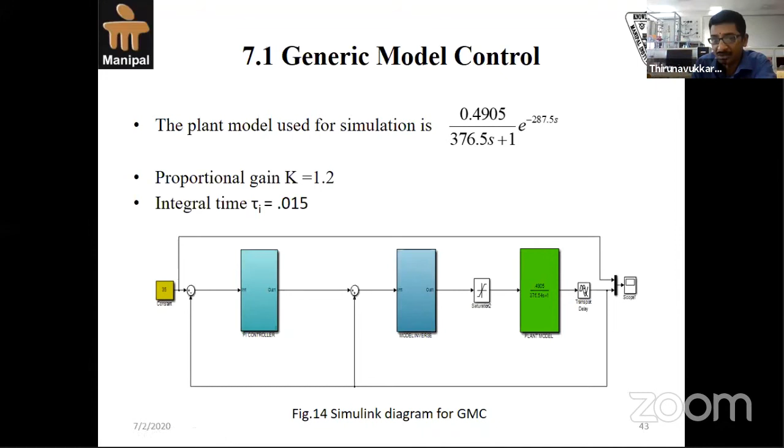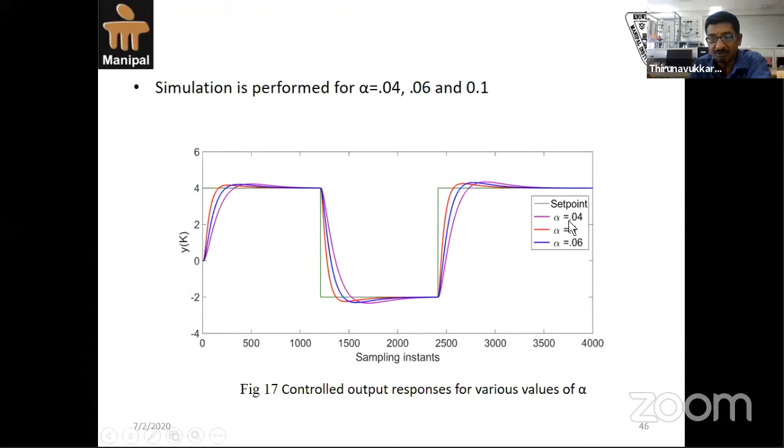Then we identified the transfer function. We simulated a proportional integral controller. It worked properly. Then we went for the adaptive control algorithm. These are all the step changes we gave with different alpha values. We're getting a better response. This is the manipulated variable. These are the real-time results, model parameter variation.

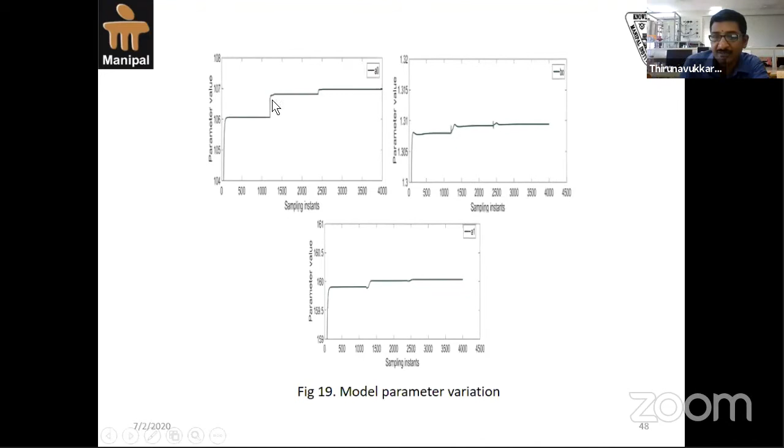Model parameter variation. So if the plant dynamics vary slowly, when I physically change the hot water flow rate, the plant parameters change, then the controller parameters change obviously. This is the control parameter variation online. There is no simulation. With the adaptive self-tuning controller, once the process dynamics vary, automatically my controller varies. But there are some limitations on this, which you will understand once you are working.

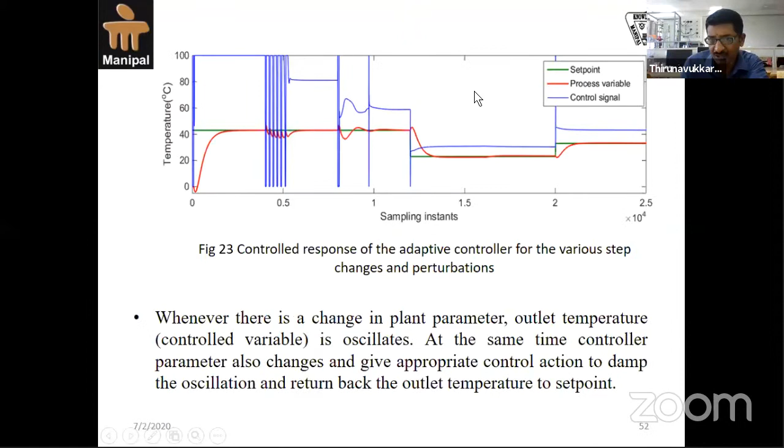So this is the simulation result. And this is the real-time result, and you can see the control parameters are varying. Even here we varied. This is the real-time response of the heat exchanger. The second nonlinear output I am showing. See here, this is the set point. Can you see the green line is settling?

A temperature process without oscillation, I'm making it settle, which once you work on it, you will know. Because if the manipulated variable is not constant, in a temperature process you can't make the process variable settle. But here you see, without oscillation, with the generic model control, it has reached steady state. Then I gave a step down, and it is acting on it. You can ask, once I give a set point change, how it is increasing and decreasing. Because a temperature process doesn't respond immediately.

It's like a tubelight and a fan. Once you switch off the light, immediately it gets switched off. If the fan is running and you switch it off, will it stop immediately? It has its own momentum. It will rotate for some time, then only it will stop. Same way, once you switch off the heater supply, the rise in temperature will not stop because it is already in the rising mode.

The temperature will increase. Then after some time it will detect that the supply to the heater has been stopped, and the energy from the heater will not be released. Then it was oscillating and then it settled. Can you see it properly settled?

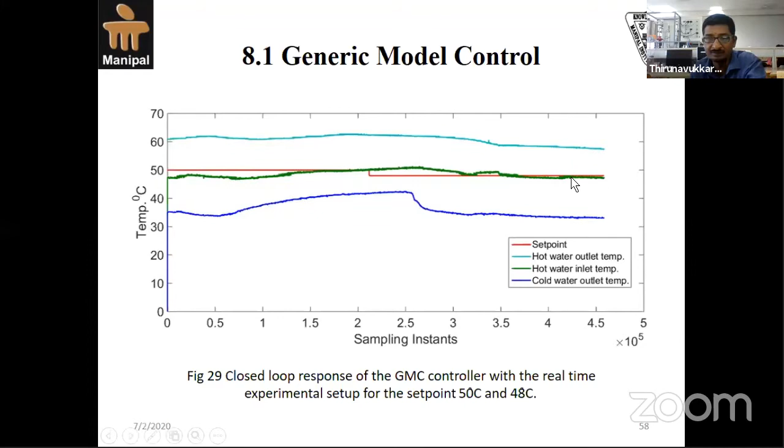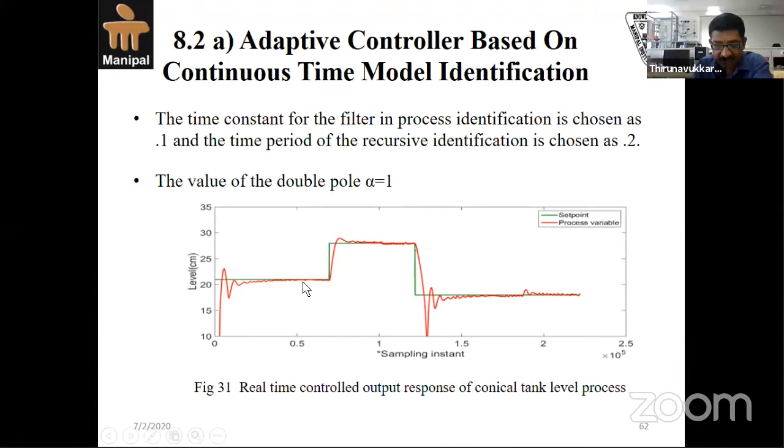So we applied the same GMC controller for the conical tank system, and we got a better response. See here, this is the controller action. Once we vary the set point, there is no second controller. Somebody asked about a multi-rate model. Only one controller I have. There is no transfer function of the model. There is no fixed controller. Once I give a set point change, directly my controller will vary.

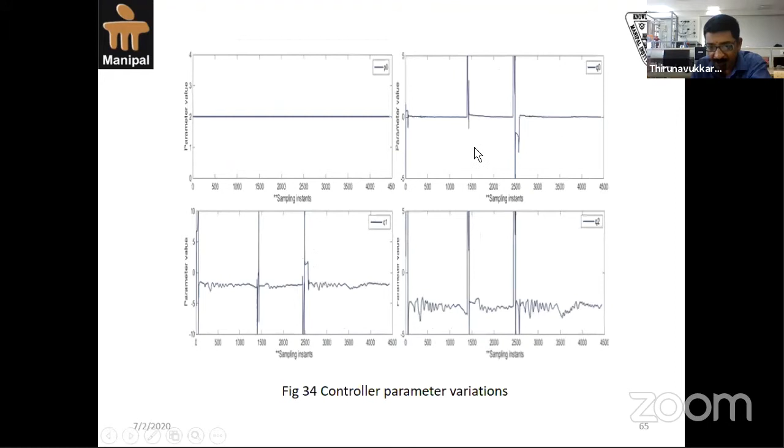So see, this is the plant parameter, model parameter variation. Once I vary the set point, suddenly my plant parameters will vary. Then my controller parameters will vary, and the output will go to steady state. This is based on continuous time model identification. You can see it properly settling, right?

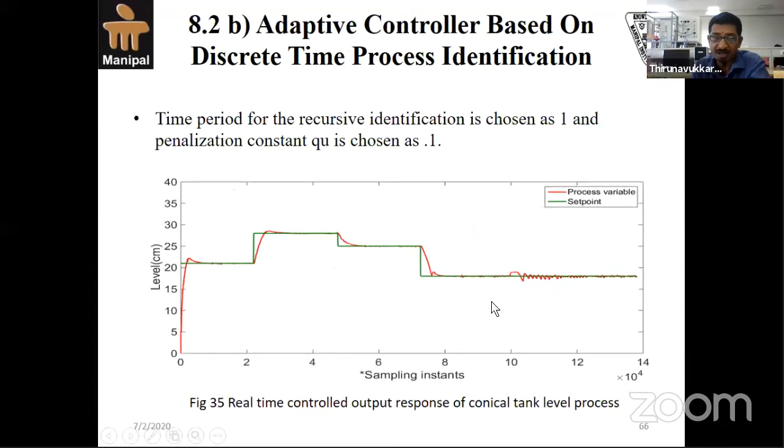See, discrete gives a better response than continuous. Remember. See, these are all continuous. You can see here it oscillates. But when we implemented the controller in discrete mode, you see the proper response we have obtained. This is the plant parameter, and this is the controller parameter variation online.

This is the pressure process. Whichever algorithm I make, I try to simulate it with a fast acting process, medium acting process, and slow acting process. Conical tank is medium acting, pressure is fast acting, temperature is slow. Now this is the second case, pressure.

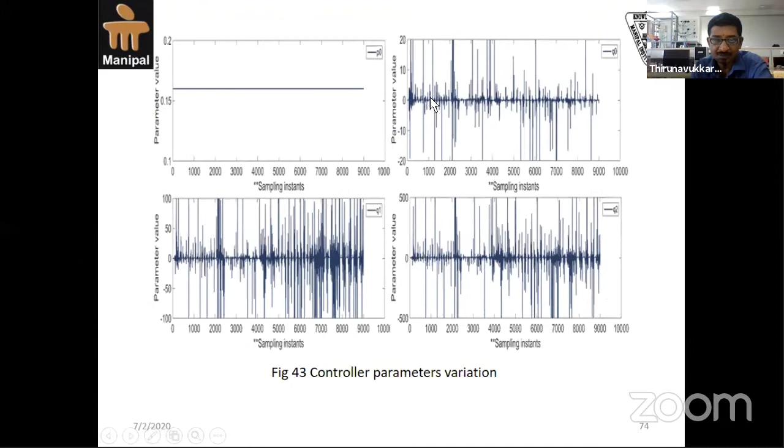See, it oscillates more. Okay, so the controller also oscillates. Model parameter varies, controller parameter varies. Okay, so here he made a mistake. I think he put wrong results here. It was 0 only. You see that wrong result, the parameters. Anyway, I have the PPT. It was varying, you can see here. See, here it varies, not at 0. It keeps on varying. Can you see? Keeps on varying.

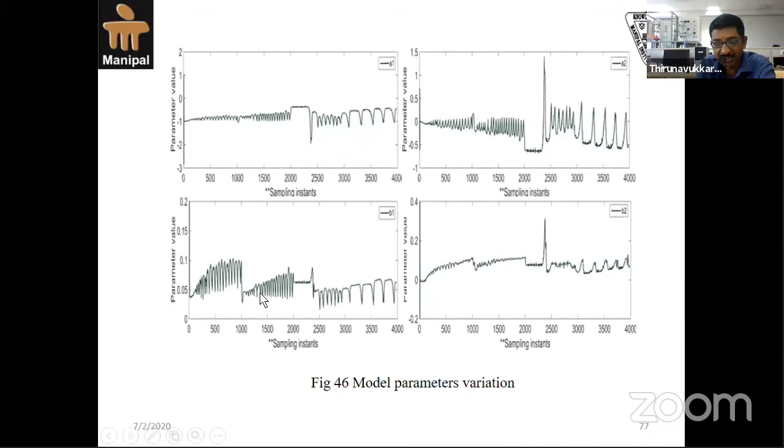Positive and negative controller parameter. The controller structure's various parameters keep on varying. Okay, you can see the variation. Once a set point change is given, suddenly it varies. See, at 1000 it varied, at 2000 it varied. It varied from 1000 to 2000 because I gave the step change. So it's varying. Conclusion, self-explanatory.

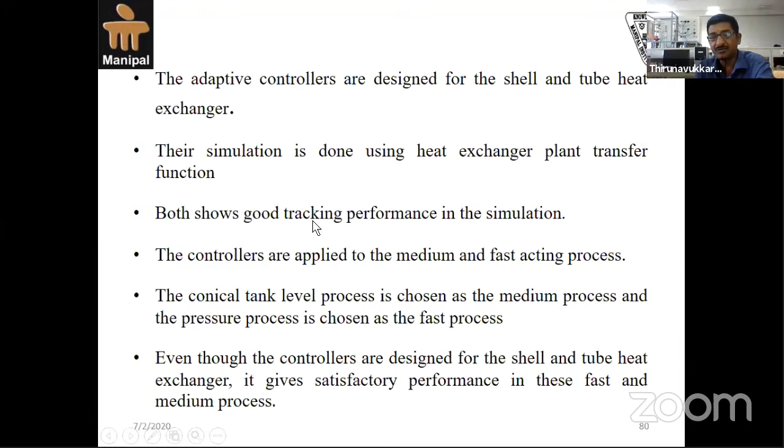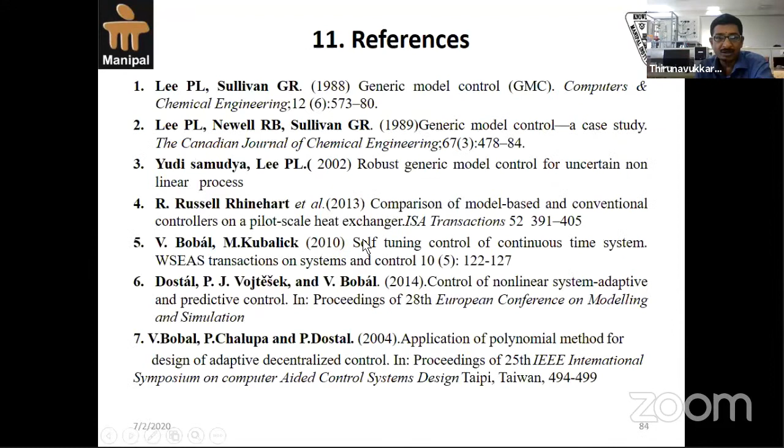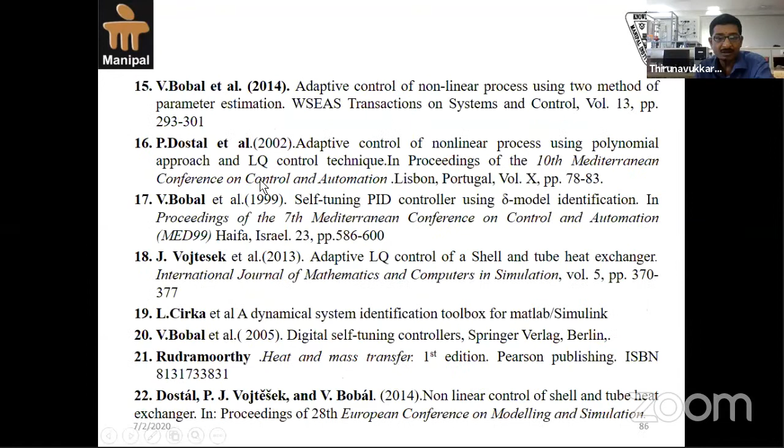We cannot compare the GMC result with the PID. It gives extreme results. Okay, so it was applied on the conical tank, temperature, pressure, flow, with good tracking performance, etc. All we obtained. Future scope: MIMO processes we will implement. So we're in progress, and you can see the papers which we followed for this: MJ Grimble, Bobál, Dostál, and mostly we referred to Bobál and Dostál papers.